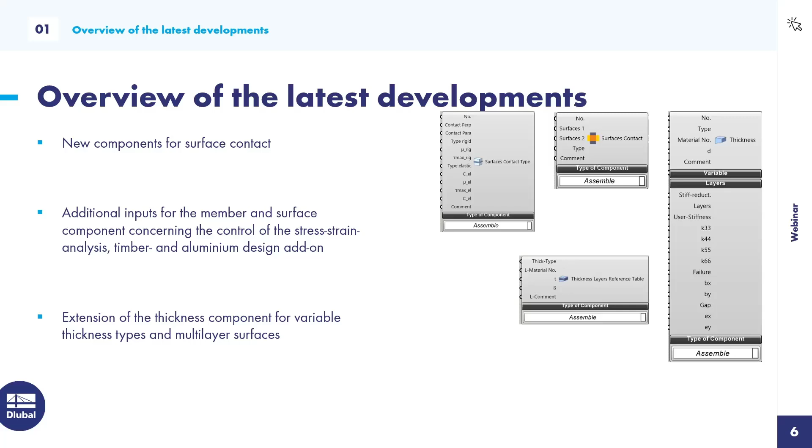The last feature that I would like to show here is actually related to the installation process of Rhino. So let me show you Rhino 8 in a second here. In the past, the plugin could be installed via a specific folder in the Rfem 6 program folder. We changed it. Everyone can install the plugin now via the Rhino package manager. So if you go into Rhino and you call up the package manager, you can search for Dlubal here, and you can see the Dlubal plugin, and here you have various versions of the plugin.

An important information for you: in case you're using Rhino 7, you should use the versions with the number 7 in the front. And in case of Rhino 8, use the versions with the version number starting with the 8. For today's webinar, I'm using an internal version. Anyway, you can do the exact same algorithm in the current customer version of the plugin.

All right, then let's switch to the second chapter of today's webinar, the live demonstration. To give you a feeling for what I'm doing in Grasshopper, I would like to show you the final structure first in Rfem, and then hop right into Rhino 8. So that's the CLT structure that I would like to model. It should represent like a bus or train station, where you can wait for your train or for the bus, and you're protected against rain and wind and so on.

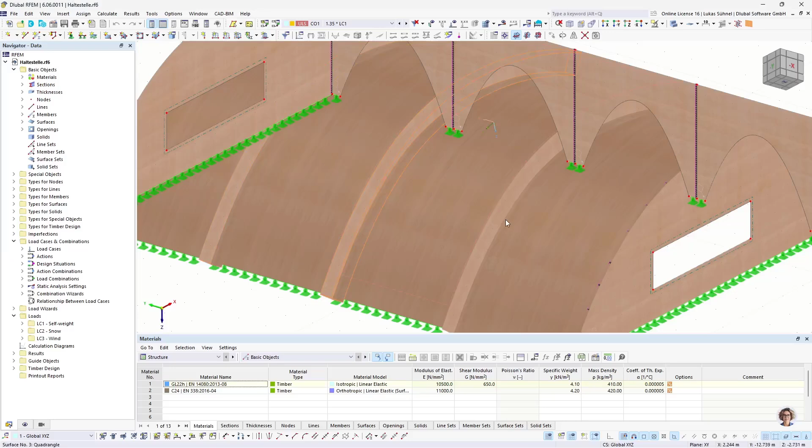So you have here these CLT wall, slab and wall elements, and inside some additional timber beams that support the roof, and on the front some openings to go to the train, and on the side some windows to see if the train or the bus is coming. Obviously a made up example, but it serves the purpose of today's webinar.

I would like to show you the workflow and some new components. What do we have here as well? We have some line supports on the bottom, and additionally some line hinges, because CLT panels are usually connected hinged. So we need the line hinges as a tool here to have the proper force transfer. That's also the most tricky part of this whole algorithm. I will explain it, of course, afterwards.

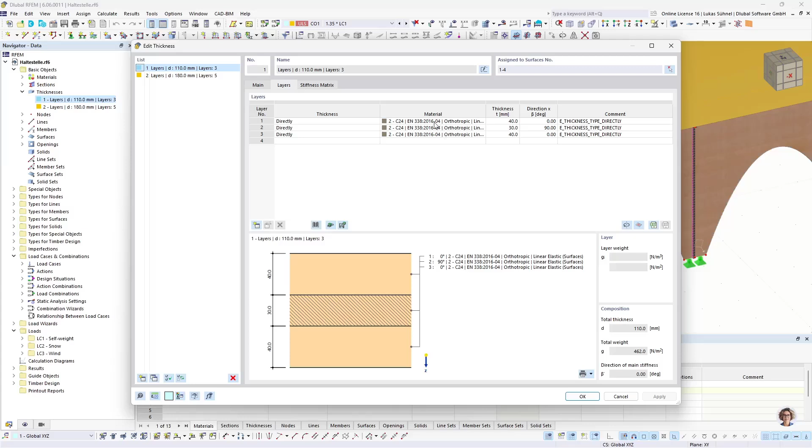And apart from that, we have, of course, our new layer thickness types in here, in which we then define the layers individually. All right. That should be it as a rough introduction of the structure. Let's go right into Rhino 8, and here I will put Rhino to the left and Grasshopper to the right in a second.

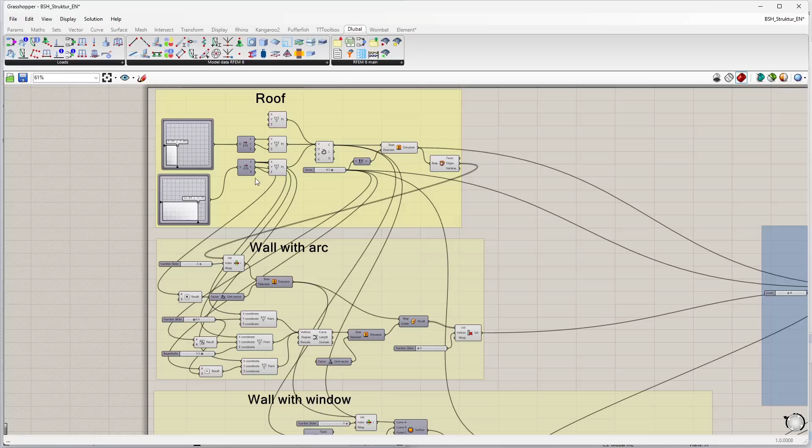One more little overview for you, what I will do in the next hour or so. I will create this algorithm here. We start with the Grasshopper algorithm, where I model the roof of the structure, then the walls with the arc, the wall with the window, then some data management, copying and so on, collecting my objects, the surfaces, the lines that I will use again afterwards, and then the connection to RFEM via our Dlubal plugin.

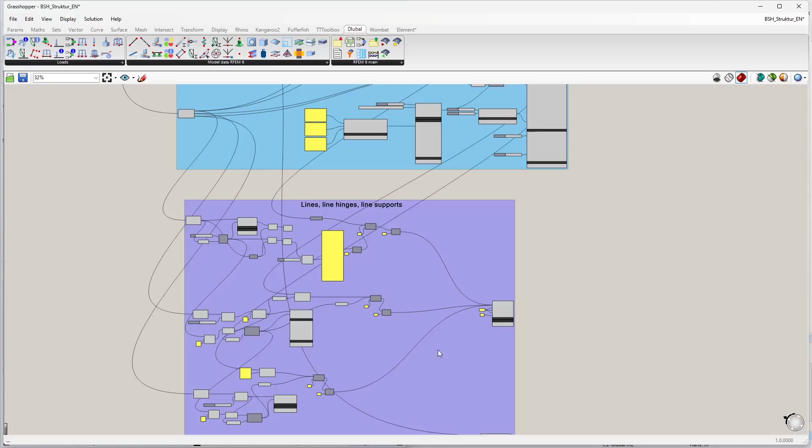I will create materials, sections and members, thicknesses and surfaces, and last but not least, lines, line hinges and line supports. All of those components then will be connected with our export component, and we get the structure in RFEM 6. All right, so let's create a new file in Grasshopper, move it to the right hand side of the screen, and start with the modeling.

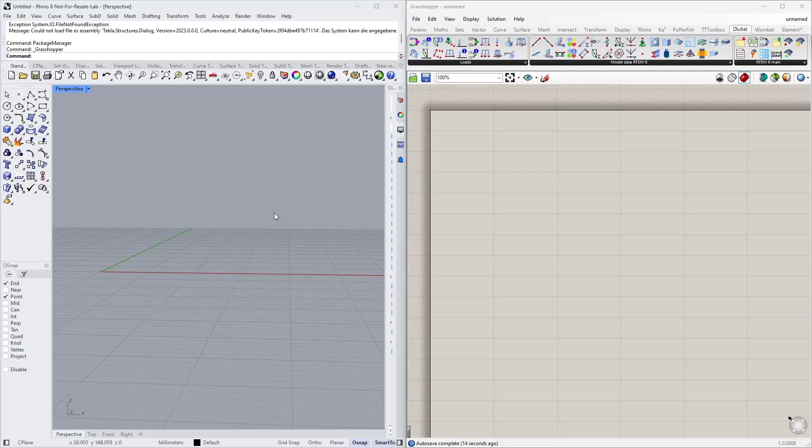As I said, I would like to begin with the Grasshopper algorithm, so I need a plan how to model that, and I will start with the roof. The roof was curved, and therefore I need some kind of a curve with the interpolate component. The interpolate component requires the nodes. You can see it basically on this little icon here. You need to define the nodes and then it will interpolate a line or a curve.

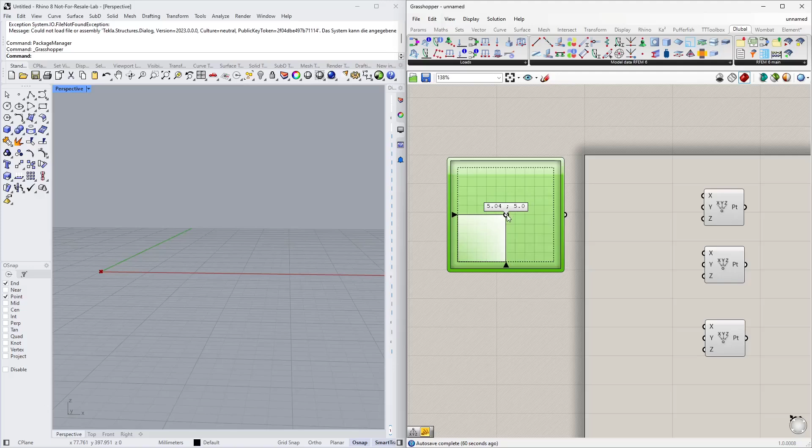And therefore I need 3 nodes and I use the construct point component for that. The coordinates of those nodes should be defined with MD sliders. This MD slider's properties will be changed a bit, so from 0 to 10. So with this slider I can define basically a node, a coordinate x, y, z. Z, however, is always 0 here, so I change x and y coordinates by moving this little dot.

Now my curve will be in the xz plane, therefore I need to deconstruct the node that I get here. So I deconstruct the node and I build it again just using different coordinates. So x should remain as the x coordinate. The y coordinate, which I can modify here, should be the z coordinate. Actually that's already the second node, my bad. The first node should be at 0, 0, 0. So that's the first node here in the center of origin.

The second node, which I can modify now with the MD slider. And the third node should also be modified via an MD slider. So same logic. Y should be set. And now I can define this arc. Let's pick some proper coordinates. And now I can connect it to my interpolate component and I have a curve. So that could be the shape of my structure, for example.

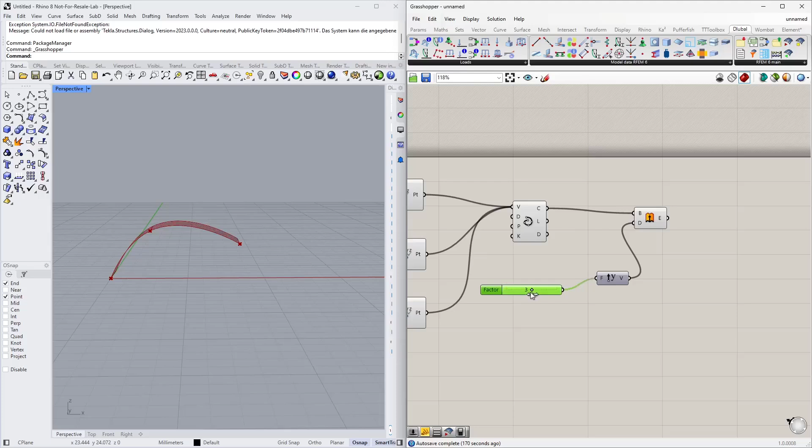Alright, now I need a surface, so I can simply extrude this curve into the y direction. I want to define a distance via a slider, so I define a slider from 1 to 5, for example, using the metric units here in my head. So now I can extrude this line into a surface. Alright, that's already the first part of my little algorithm. And I group it, and for a better understanding I can give it a little name. So that's my roof surface, for example.

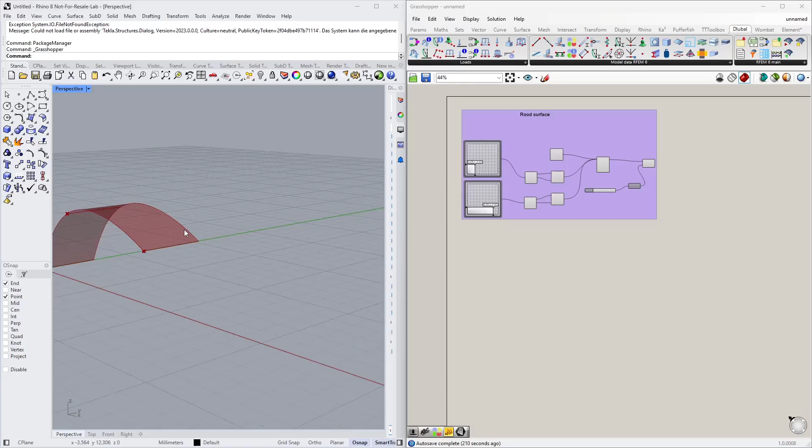Alright, so second part is the wall on the front. Let me show it again in RFEM so you can follow easier. I want to create this wall now with the arc-like opening. So what I need for that is this line here, and I want to extrude it into the Z direction. To get access to this line, I will deconstruct that surface. Therefore, I have here the deconstruct brep command. I link it to my surface.

Now I have here the faces, the edges, and the definition nodes. And I need just one of these edges, so I take a list item component, connect it here, then define the little slider to select the line from that list. Let's see which it is.

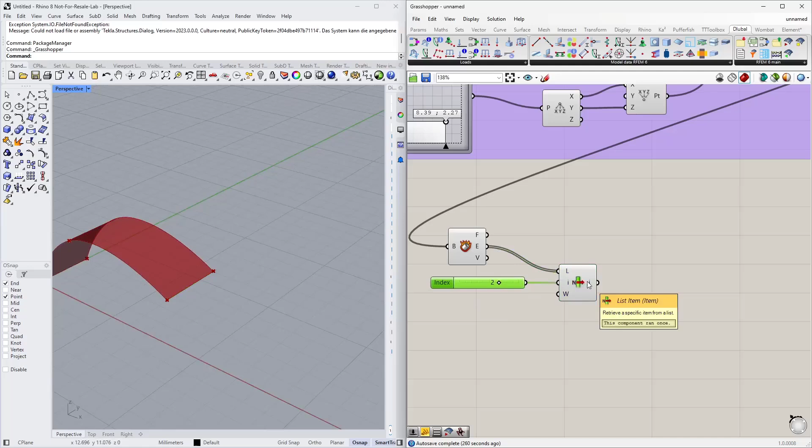Index 0 is the one on the end, on the bottom. Index 1 is this arc. Index 2 is the line that I need. Alright, so I have this single line in this component now. And now I simply extrude it again in the Z direction. And we can already see it is the wrong direction.

So I probably need to multiply it by -1. And the coordinate itself comes from my arc or my curve that I defined in the beginning. It's the Z component or Z coordinate of that node. So obviously the Y coordinate here, and multiplied by -1.

All right. Yeah, sorting can be done at the end of the day. All right. So where should the first node be? Basically, all of the nodes have the same X location as the wall or the end point of my curve. So the X location or the X coordinate is always the coordinate from the last point of my curve. And now I need to modify the Y and the Z coordinates.

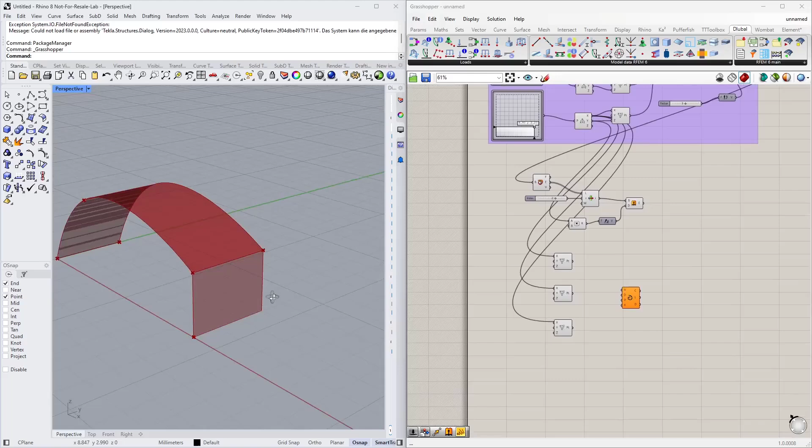The first node should only move slightly in Y direction, so I make a small number slider, and I want to have like floating points, so I change the type of it and connect it to the Y coordinate. So this distance that I define here via this node is basically the length of my wall support on the bottom.

The second point should be in the center. Center basically means the dimension of the extrusion divided by 2. So divide by 2. Link it to the length of the extrusion, and that's my Y coordinate for the center point. And I need a number slider to modify the Z coordinate. All right. Maybe also with floating points, so like that.

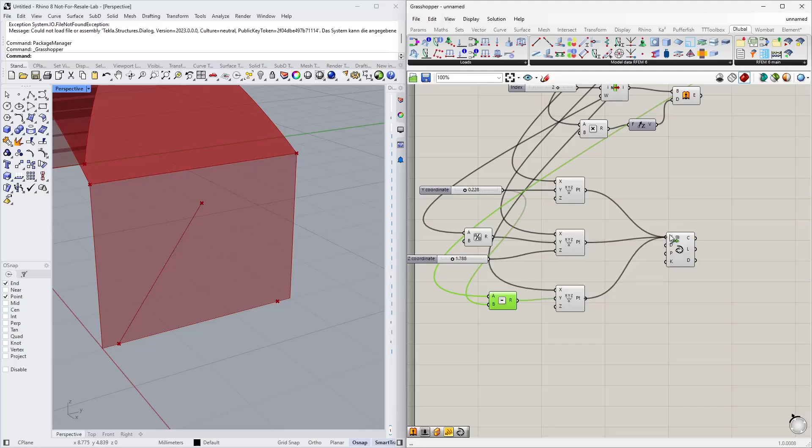And the last point is again on Z on the bottom of the surface, and it should have the same distance as the first point. So again, I just do a little subtraction. I subtract my required support length from the extrusion length. That's the Y coordinate. So whenever I change the length of the support, it will change on both sides. All right, these are my 3 definition nodes for my curve. And now we can see it.

The next step is, let's say, like a trim command. I would like to cut out this part of the arc from the rest of the surface. I can do that with the component split brep. The base surface is this one, and the so-called cutting shape is a surface. So I need to extrude my arc again into X direction to get a surface for it. So actually extrude first, extrude in X direction. Yeah, just any surface. And now I can use it to cut the original shape.

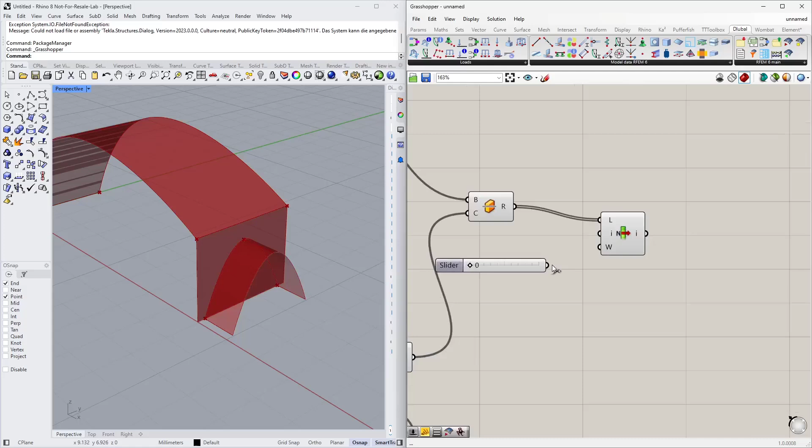I get here 2 surfaces now. I just need one of them. So again, a list command to pick one of those indexes. And a little slider to select the right one. So index 0 is, let's say, the surface of the opening. So index 1 is the remaining surface, and this one I want to keep.

So let me hide some of the other objects to see the result of my little algorithm. That's the remaining surface. That's the one I need for later. So I already finished the second part here. Again, I could give it a name. Arc, surface, whatever. Just that I can easily understand what I'm doing even a couple of weeks later here.

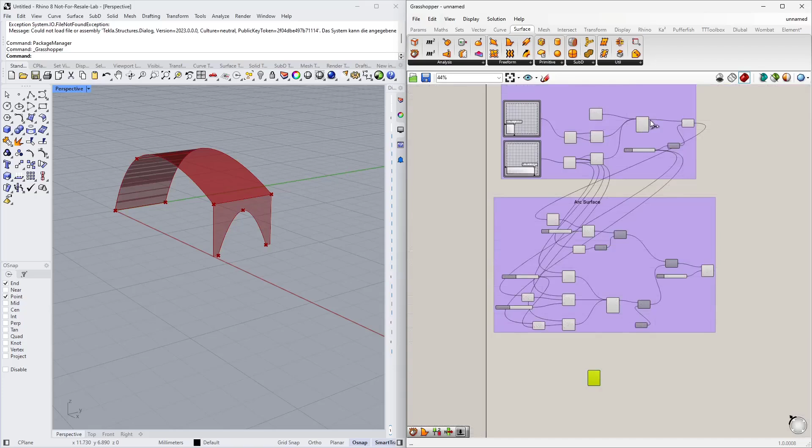And now the last surface is the surface in the front. To create that, I would like to use the edge surface component. I only have to define the boundary lines. One of my boundary lines is, of course, my arc that I defined in the beginning, like from the roof, or not arc, but curve.

And the second curve for my surface should be this side line of my front surface. So again, I deconstruct this surface here in the front, and I try to select this line here on the side. Again with the list item component.

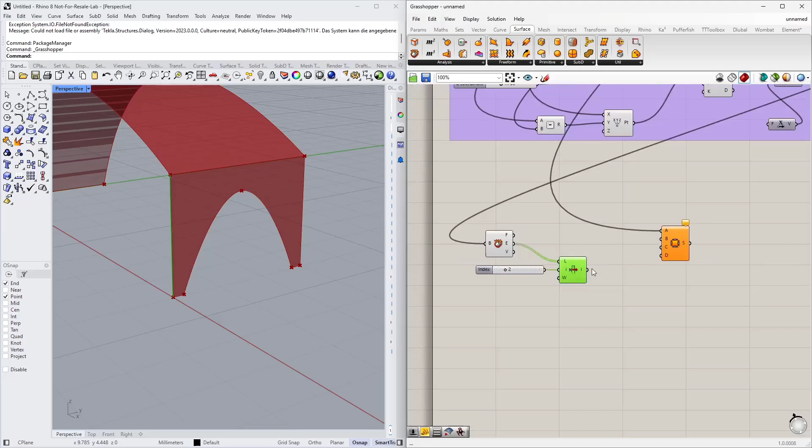Let's connect a slider to it, and now let's go through these lines to see which of them it is. Oh, sorry. The edge lines, of course, obviously. So that's the other side. Oh, come on. Yeah, now I have it already, index number 2. It is, yeah, that's the line I need. So I connect it again to that surface component, and I already get the final shape.

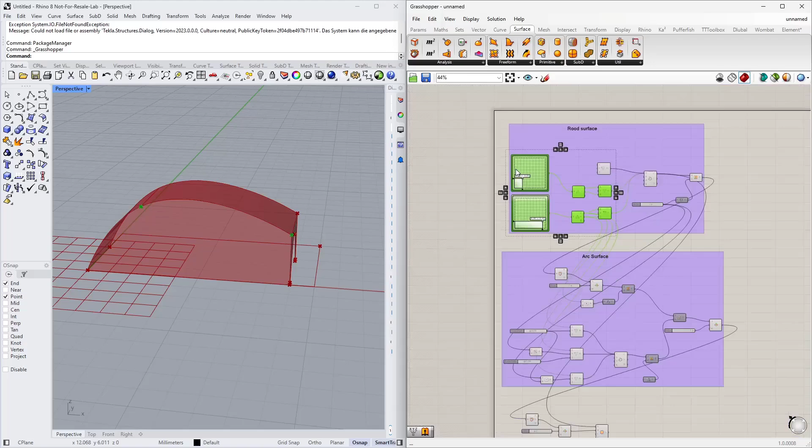So far so good. Now I need to cut out a rectangular hole in here. Same logic as before. I will create the rectangle in this case by 2 points. The 2 points are A and B. And then I extrude the rectangle and then cut it again from the original surface. These 2 definition nodes of the rectangle can or shall be defined again via an MD slider. So I just copy some of those things here, copy, paste, and I will reuse it down here.

This time, yeah, no, actually that's already okay. I can connect them as definition nodes for my rectangle. The rectangle can be placed in any plane, as you can imagine. So I can define the plane by setting it here graphically, or in the Rhino lock, or however you call this area here on top. And I would like to have the rectangle in this ZX plane.

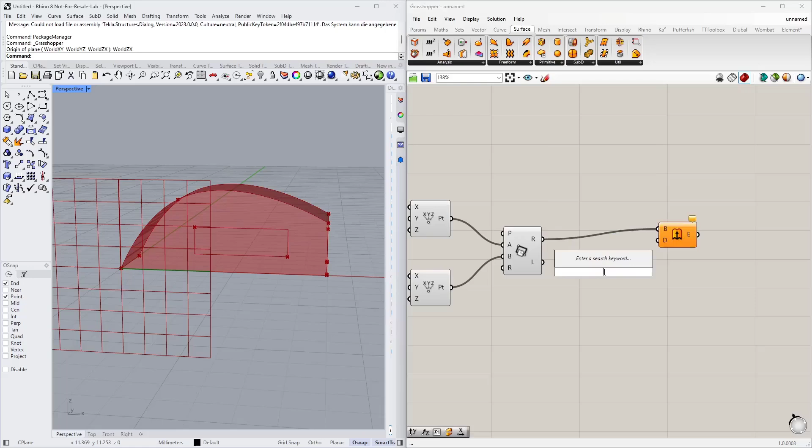Okay, that's not on the right plane. Let's set some proper coordinates for the rectangle. So maybe that's the size of the window that I would like to have, and now I have my rectangle here. Again, I extrude it into the Y direction, and now I can use the split command again, split brep, to cut out a hole.

Let me copy the list item that I defined on top here. Again, I want to keep only one of those surfaces, and this time I think it is the index 0. Exactly. So let's hide some stuff to see the result of our work here. That's the remaining surface with the opening, the rectangle opening. All right. That's already the basic geometry that I need.

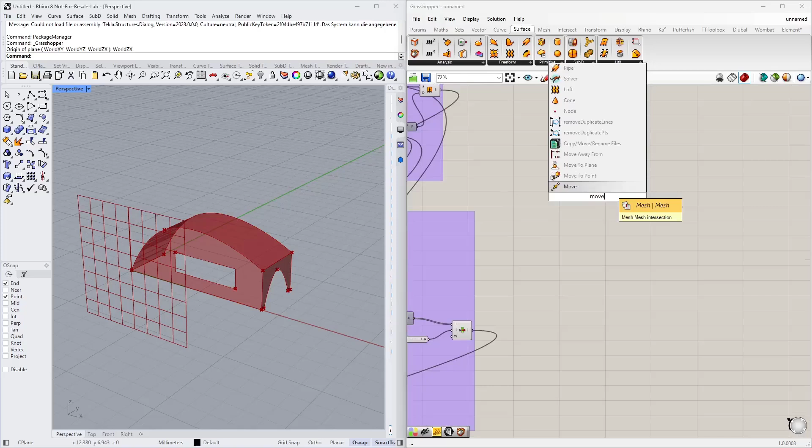And now I can copy this stuff. Side wall, let's say. Okay. Now let's copy the surfaces. That can be done with the move command or move component. And which objects do I want to copy? Of course, my roof surface and my front surface. And the default is set, as you can see. It's copying it in the vertical direction, which is not correct. I want to copy them in the Y direction.

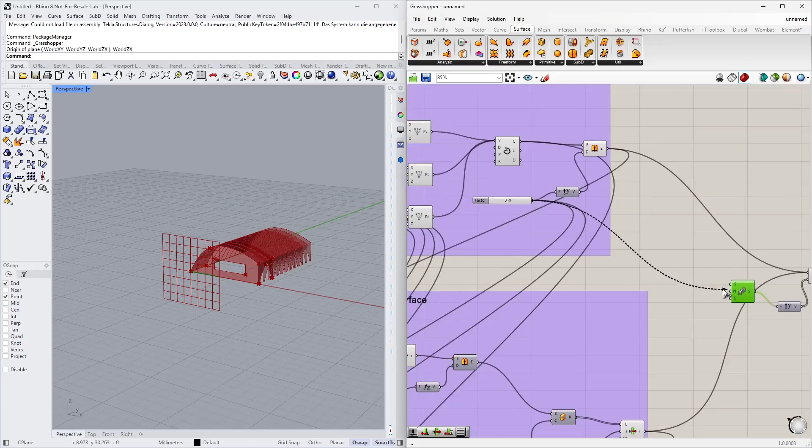And I want to copy them multiple times. For copying something multiple times, you can combine a move command with the series component, and as a step I would like to use the extrusion length, of course, to have them placed next to each other. Now I can control the amount of copies with a small slider, let's say 4 copies. All right. That's a big part of the structure.

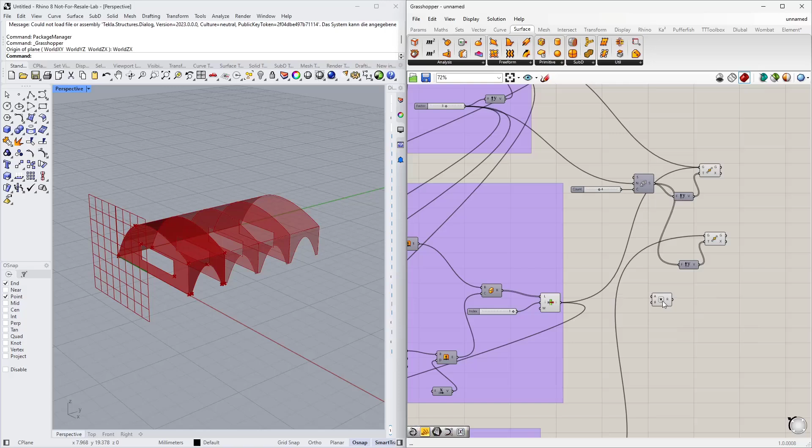Now I only have to copy the front surface to the end. So I use another move command for that. And I copy this surface. Of course, not multiple times. I only want to have it one time. And the distance for this is actually a little multiplication. We simply multiply the extrusion length with the amount of copies. And that's the length that we need to copy it from the front to the end. Okay. So far so good.

The geometry is done. What I need now is a little bit of data management, because afterwards, thinking of the RFEM 6 connection, I need a collection of lines. I need the collection of lines on the bottom, all of those down here, because on those lines I would like to assign a line support. And I can use these lines in my line support component to export it to RFEM 6 afterwards. Additionally, I need these 3 internal curves, because I want to assign a member or a cross section to them. And maybe also a collection of all of the surfaces that I have.

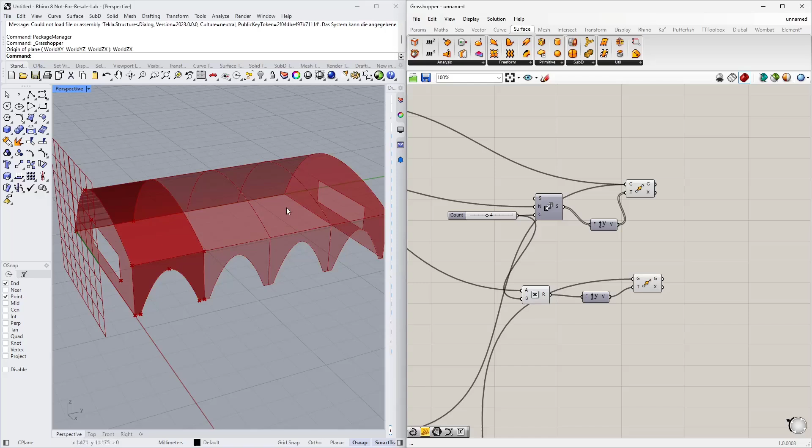So maybe let's start with the curves for the beams. How do I get those? They are basically inside that component. This component contains all the surfaces from the roof and from the front. Now, if we take a look at the data in that component, we see that it has 2 groups. Let's call it 1: 4 open extrusions. These are my roof surfaces, and in the second group, my wall surfaces.

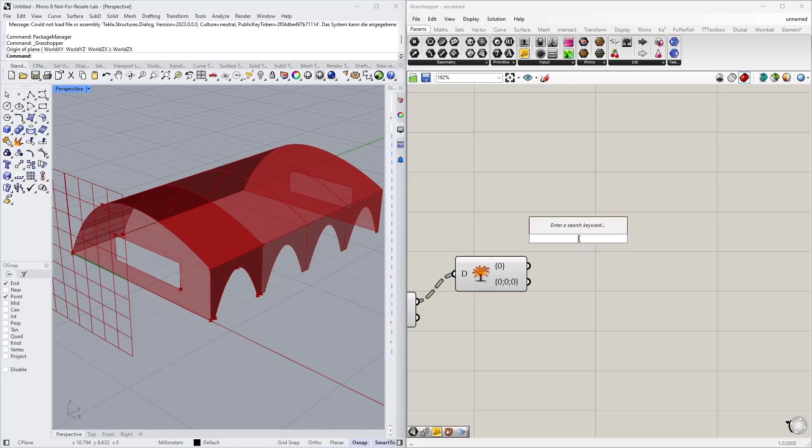So what I can do here is I can explode this tree and get access to each branch of my tree. First branch, second branch. And the first branch, as I said, contains the surfaces of the roof, and I can deconstruct them again.

So you can see it here again. Those are the surfaces, and of course the boundary lines and so on. And now I would like to select only these internal curves, so basically just one of those lines per surface. So I need again a list item component from my edges, and let's see which of the index numbers it will be.

The index 0 is the lines on the bottom. I need that maybe later for my line supports. I'm looking for the roof curves. And index number 1 is the one that I need. It contains these curves. However, it contains 4 and not just the 3 that I need.

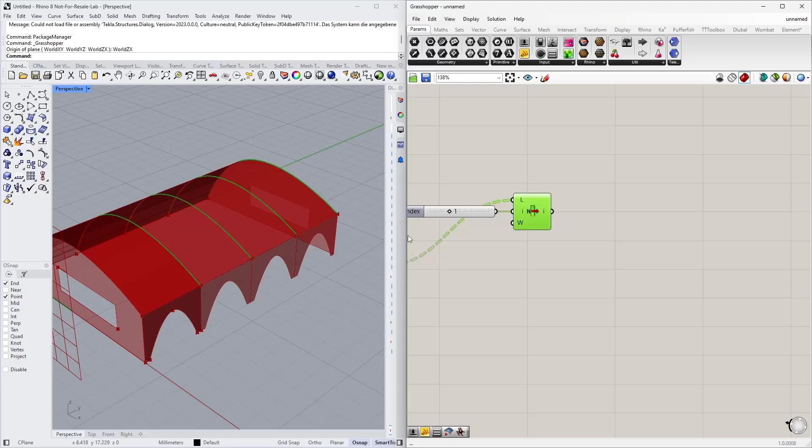So what I can do now is get rid of the last index from that list. Currently, it is not a list. It is, let's say, a tree. On each branch of the tree, I have 1 curve, but I can make a list out of it by flattening this tree. And now I remove the last index. It can be done by using the cull index component. And the last index can be defined by a panel with the -1 value. And the remaining lines are the ones that I need for my beams.

So let me collect that in an additional component so I can easily reuse it afterwards. Maybe again a little comment here: curves for beams. Okay.

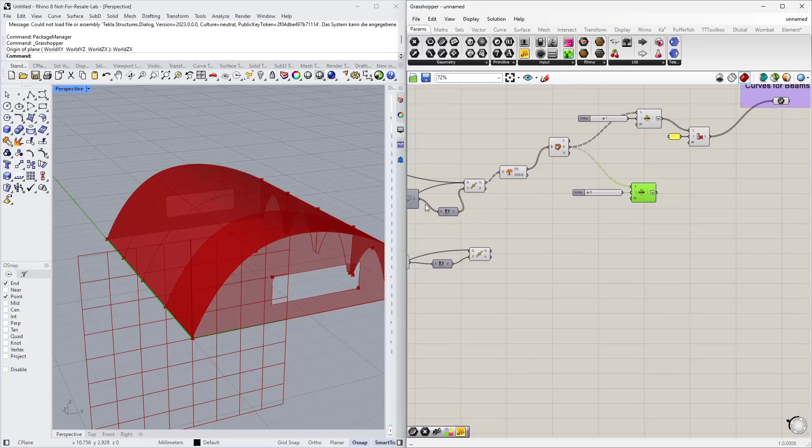Now, the second part should be the curves for my line supports. We already saw it in that component. Here I can select the curves on the bottom of those roof surfaces. It was the index 0, so that's already one part for my line supports. And the other bottom lines are included in the wall surfaces.

So basically I can copy this part, connect it to my surfaces here in the front, and now look for the index number of those walls. Which of those lines are the ones on the bottom? So I scroll through that. Index number 1, as we can see. And now my slider is not long enough, but I can tell you that it's the index number 5. So I need index 1 and index 5. So I create a little list, 1, 5, and connect it to that component.

So this list item gives me now 2 lines, the index 1 and the index 5, and you can hopefully see that it's the line on the bottom, on the right and on the left side.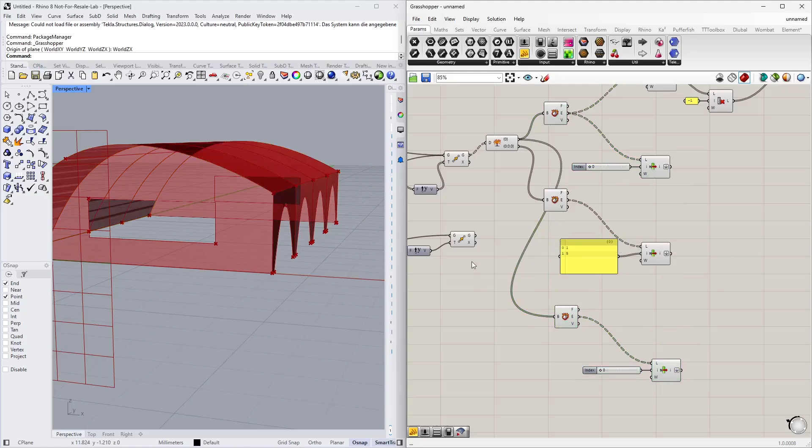Now I need the bottom line from the side surfaces. Same procedure. I copy again this part. I connect it to my, well, actually I need 2 surfaces: the front surface, which is down here, and also the copied surface from the back. And from both surfaces I need 1 line. We can already see it is the index 0. So in here I have now 2 lines, and these are now the lines that I need.

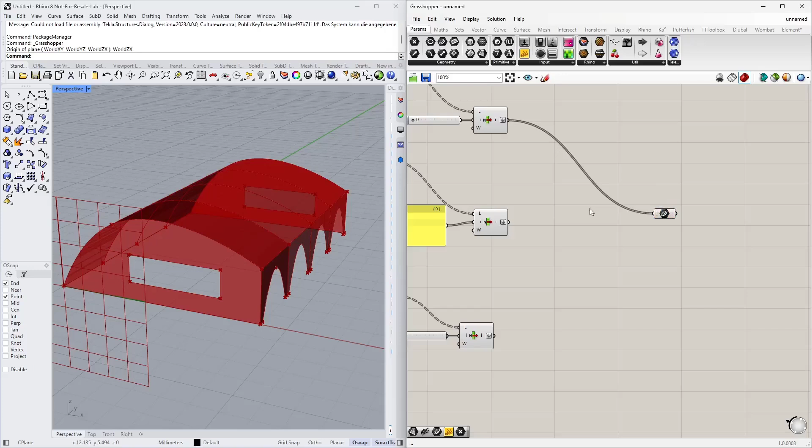I can collect all of them in one component again. So just connect them to the curve component, and that component contains now all the bottom lines for my line supports. So again, give it a little description: line support lines. Okay.

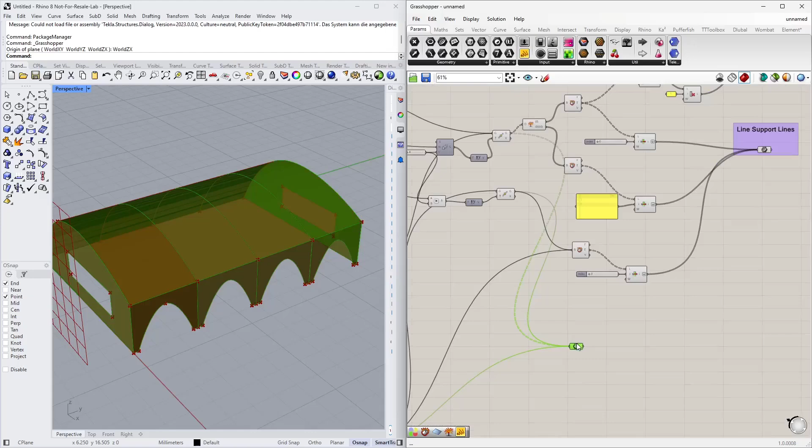And then I also collect my surfaces in a surface component, and I think most of them are contained in that component where I copied them. And additionally, I have the front wall and the wall on the back, which is in here. So this surface component contains now all surfaces. All right.

So far, so good. Now, the next part is the connection to RFEM 6. Therefore I need my Dlubal plugin. Let me increase Grasshopper for a second. The Dlubal plugin will show up after you install it, obviously, and it is divided in 3 parts. We have the model data group, which contains most of the basic objects: nodes, lines, members, surfaces, materials, sections, also components for solids, for thicknesses, supports. I think most of the stuff that you need is implemented in here.

We have another group which is called loads. In here you have components to create load cases, load combinations, but also the loads: nodal loads, line loads, member loads, surface loads, but also imperfections, in case you want to assign them as well. And the last group contains general components, for example the export component, import component, a component that allows you to run the calculation of RFEM 6 via Grasshopper, or other components. For example, as I said, I use in the internal version the global mesh setting component.

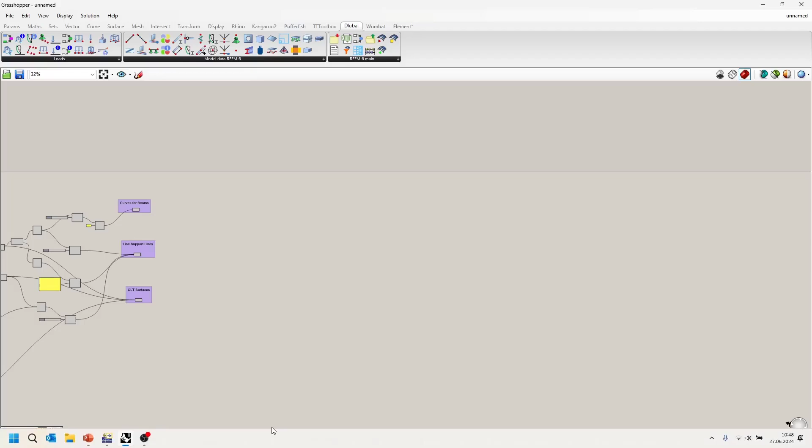All right, how do we start? I think RFEM gives us a nice hint here. The data navigator in RFEM shows us the basic objects and then specific objects, types for nodes. And it's kind of the logic that you use when you're defining your structure. First you define materials, then the sections and the thicknesses. Then you continue maybe with members and with surfaces and solids and so on. And the same logic we use in Grasshopper. I start with the definition of my materials and sections.

The material component can be found here. A material can be defined by the index number that it should get in RFEM 6 and the name. The name ideally equals the name of this table down here. So you can define your material in RFEM and copy the name. By the way, to get the full name, you can check the program options and see if you have the full section and full material description activated in here.

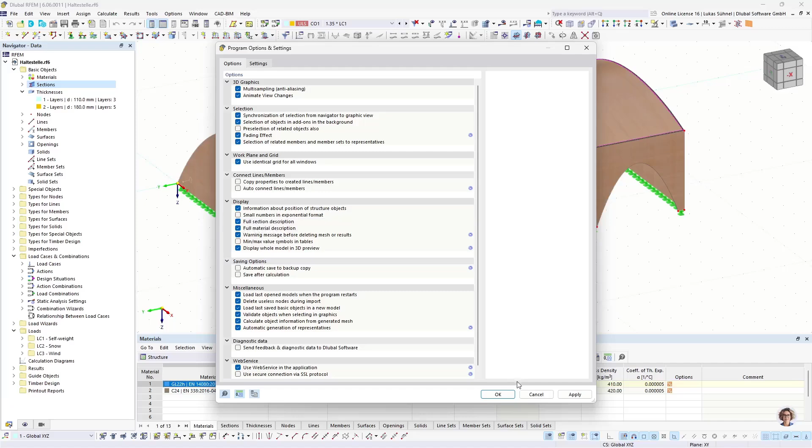If you do not have this option activated, you only see GL22H. The code related part of the name will not be shown. But to have a clear assignment of a material, you need also the standard. So we can copy that name and paste it into Grasshopper.

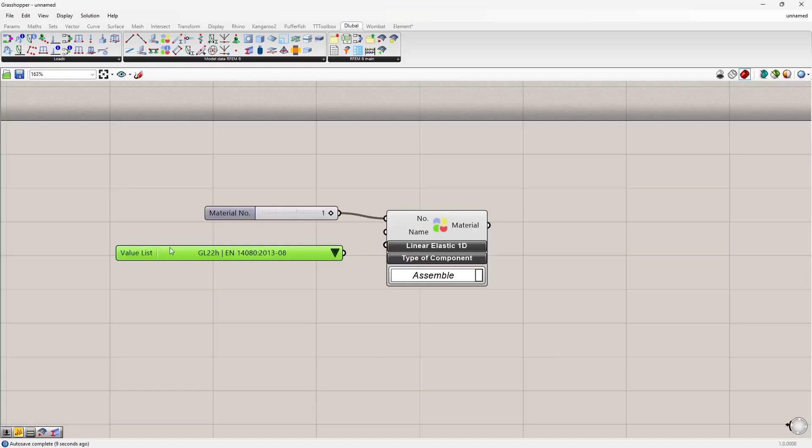Alternatively, if you had previous projects and you already defined materials and sections, you maybe already created a little library of materials and sections that you use again and again. And that's what I did. I defined here a value list, and I put my own information into that value list.

You can do it by editing this value list and then just insert the names into it. That's the name that it shows here, and then that's the name which is behind that little description. It's identical for me here, but you can simply copy these things here. Then you select the material that you want from that little list and assign it to the name input. And that's all you need to do.

I copy my material. I need a second one. Make sure you change the index number. And then I select here the material C24. The first material is for my beams. The second one should be for my CLT surfaces. And for surfaces, we have to use, or that's what I want to use at least, the orthotropic 2D material model. So I use a value list to read the options of this material model input, and select orthotropic 2D.

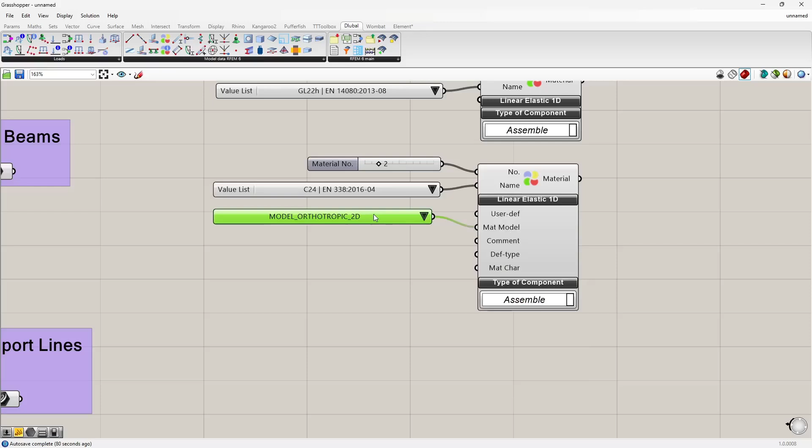All right. Now, next step should be the definition of a section. Therefore, we have the section component, the section for my beams. And again, I assign a name, a number, and I have to assign a material and the name. The material I can link directly from the material component to the section component. This step can only be done if I define the index number first.

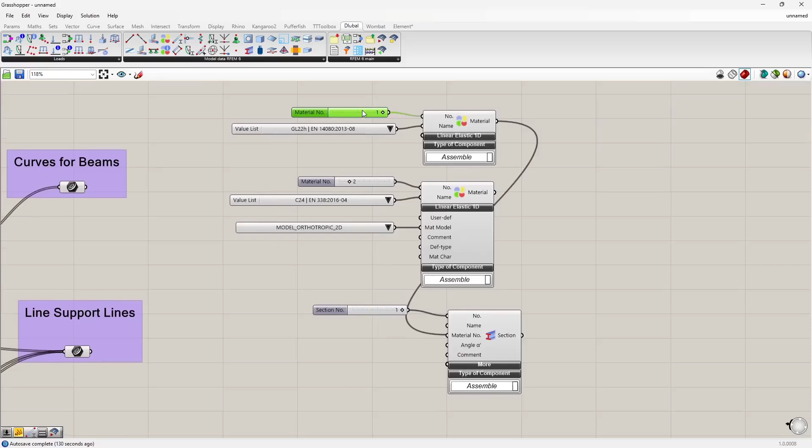Because what we expect in this section component is the material index number, 1, 2, 3, 4, 5. And to transfer it from that component to this one, I have to assign it here first. If I do not assign it, this connection will not work. That's why personally I usually define all these index numbers for all my components so I can link them together.

Now the last thing is the name. The name is quite easy. It's an RM1, rectangular massive section, and then the width and the height. And I could copy the string and paste it into Grasshopper, or I build it parametrically. The name is just a bunch of strings combined, basically, text panels, and the name consists of the part RM1, then a value for the width of my section. And I use here a slider from 0 to 1. I explain it in a second.

Then the next part of the name is the slash, and then another slider for the height of the section. All these parts of the name can be joined by a text join component. You just plug it into this input here. And you get the name, or you get one string out of it. Let me show it. Here we are missing the space. Okay, so that's now the name according to RFEM. There is just one little difference.

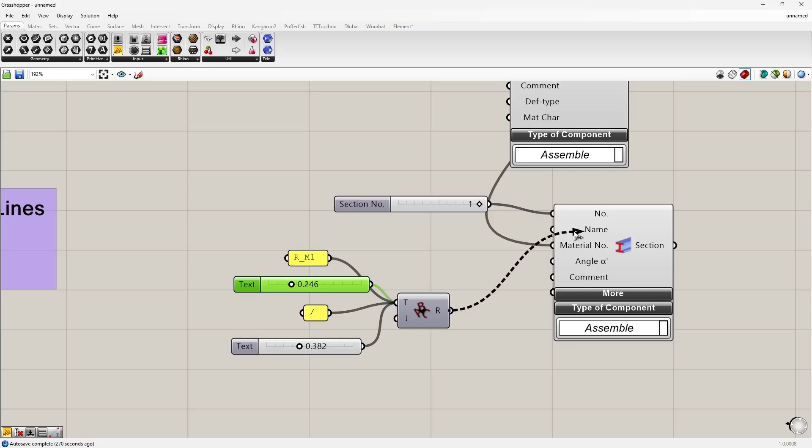You can see here I'm using meters, 0.24 meters, and not millimeters as it is shown in RFEM. This has the following reason. The Grasshopper link is based on our web service, on our API, and this API expects SI units. So I have to define the dimensions of my sections here in meters, so that I get the right size in RFEM. Therefore, a scale between 0 to 1. Now I can link it to my name input and the section is done.

Last step for this first group here is the member component. Let me show that too. A member component with some basic definition inputs. Under more, you find options for hinges, eccentricities, nonlinearities, or rotations for the member, and under design, related inputs. Let's start at the beginning.

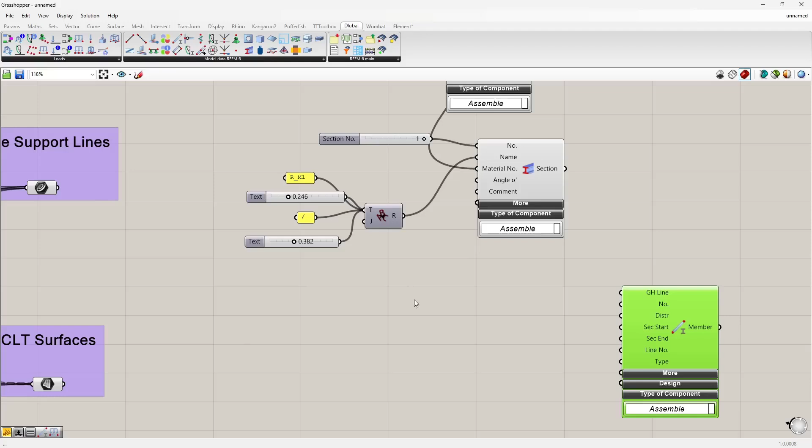I need the Grasshopper lines for my members. These 3 lines. Let me rotate the structure. These are the 3 beams, and I already collected them in here. These are the curves. And I connect them to my member component.

The section should be this rectangular section, and that's basically it. There's just one thing that I'd want to define in the member, and that's related to the design. I have here timber beams, and I would like to feed already some timber design related settings, so that when I export it to RFEM, I have most of the information already defined for the design, and I just have to calculate it.

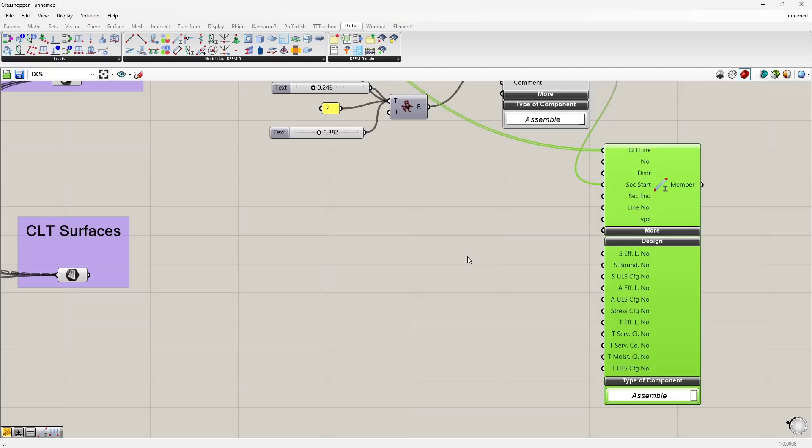So I have some inputs here, as usual S for steel, A for aluminum, then T for timber, and for timber I can define the index number of the effective length type, the index number of the ultimate limit state configuration, or the index number of the service class. I can't define these classes in Grasshopper, but I can define the index number of the existing type.

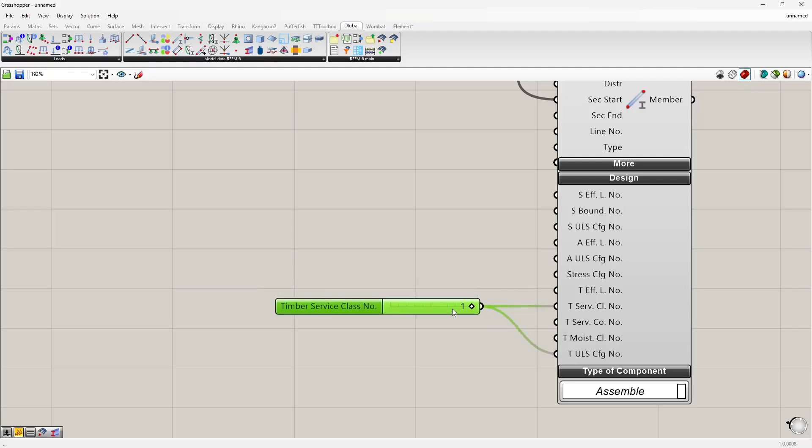And now you may ask, which existing type? We never defined them. That's where the templates come into play, and I will explain at the end of this webinar how it is working. So let me define these types. I used index number 1, and again, more details I will show at the end when I explain templates. So that's already my first part. Let's group it. Materials, sections, and members.

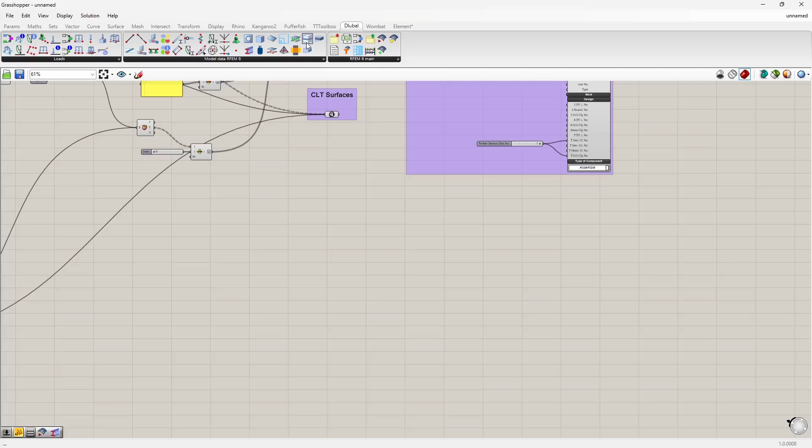Okay, that's what I have to define here in Grasshopper. So let's start with the thickness component, which we have here. And the thickness component, again, needs an index number. Then the type, I can use the value list for that. In 99% of the cases, the tooltip will tell you what kind of input is required. You can see it here, value list. So I connect it, and I can select here layers.

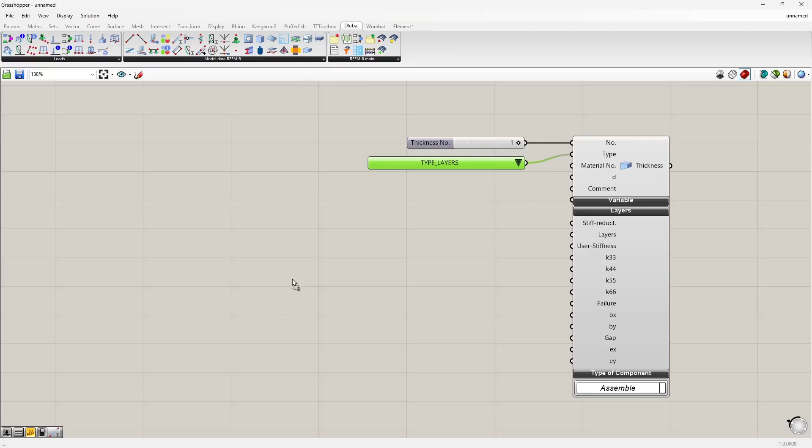In case of layers, I can open the layers tab in this component, and here I have the layers input. The layers will be defined in an additional component. We had to split it up. So in that additional component, I define the material, the thickness, and the direction. This little table that I displayed in RFEM 6, and this information will then be transferred to the thickness component. All right, the material should be material number 2, C24, orthotropic material model.

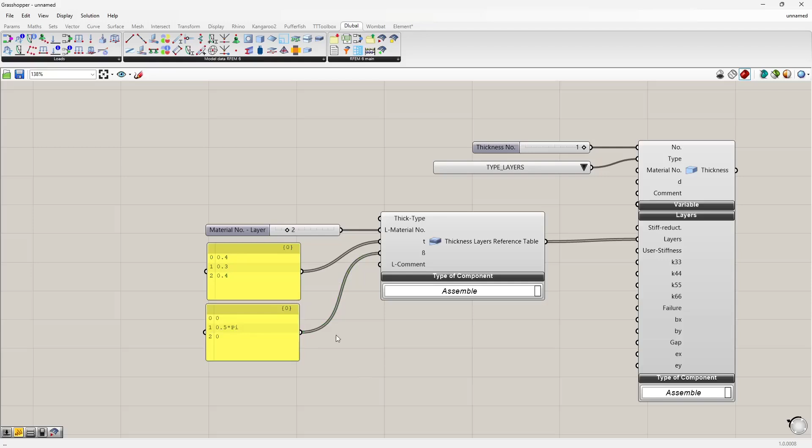The thickness can be defined in a little table. Let's say 0.4, 0.3, again meters, 0.4. And that should be a list. And the same logic for my rotations, the direction of each layer should be 0, 0.5 multiplied by pi, 90 degrees, and 0 again. Okay. This is this little subtable which I showed in RFEM, and it is connected to the thickness component.

We have a lot of additional inputs in here. I can show them as well in RFEM. I do not use them today, but in case you want to apply a stiffness reduction to these CLT thicknesses, then you can activate them with this button, and then you have access to these modification factors and additional options, and all of them are included in our component, as you can see here. So that's the thickness that I want to create.

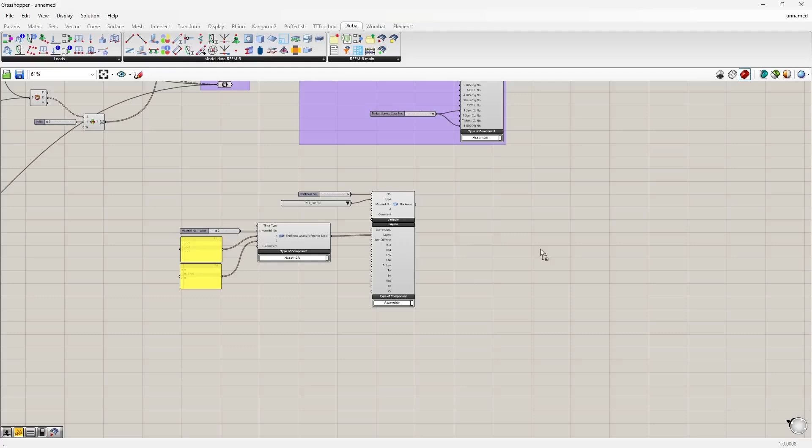Now I need to connect it to a surface component, and the surface component expects additionally the Grasshopper surface. Now I want to use that thickness type for the roof surfaces. That surface component here contains all surfaces, again in a tree-like structure. I showed it before, 3 groups. My roof surfaces are in group 1, so what I will do here is I explode the tree that I have here and use, I need it later as well, the surfaces from the first branch for my surface component.

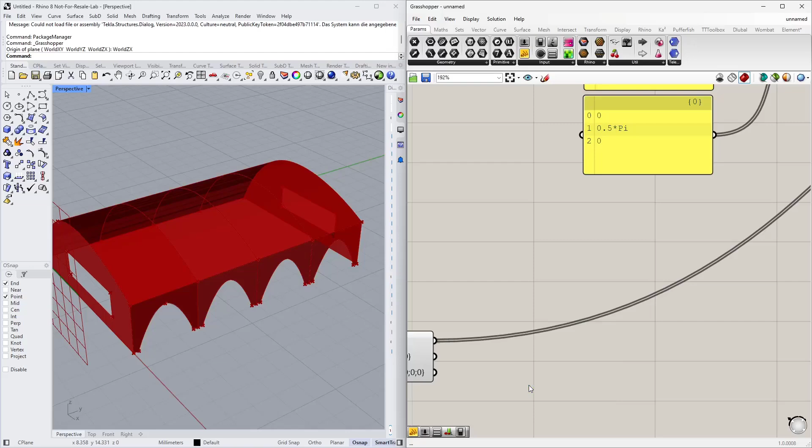The last step here is the numbering. As I said, I tend to number all my surfaces, so that can be done with the series component. The index number starts with the value 1. So I define here for the start index number 1. The step is of course 1, so 1, 2, 3, 4, and the amount of index numbers that I need is linked to the length of this list. I have here 4 surfaces inside, depending how many copies I create in my Grasshopper algorithm. So the length of that list is basically the amount of copies that I need.

So I can count the length with the list length component and connect it here to the amount of copies. And now I get a list of 4 index numbers, 1, 2, 3, 4. That's what I need for my surface. All right. That's the surface component. And now I need another surface component for my walls. So I simply copy all this stuff.

Copy paste. This time I want to use the remaining surfaces. So these are my front surfaces and these are my surfaces from the side, and I connect it as Grasshopper input. Concerning the thickness for the walls, here I would like to use 5 layers, so I simply copy them.

Okay, same for the directions. Okay, and I need to change the index number, obviously, of my thickness. That's second thickness, so index number 2. Again, the remaining part is the numbering of those surfaces.

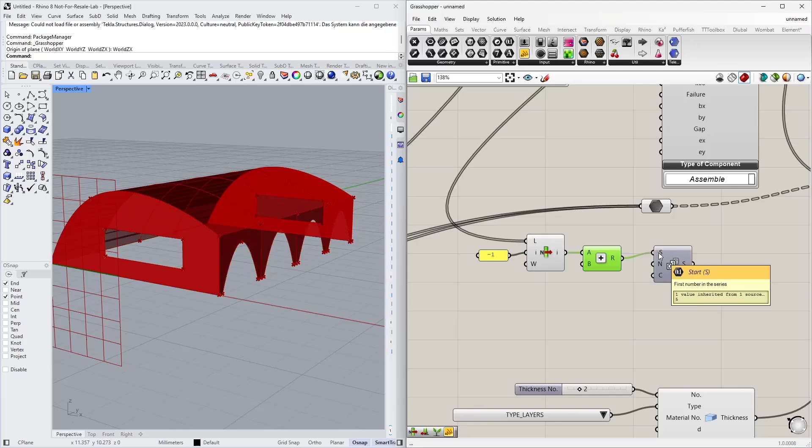And now I have here index number 5, which is parametrically defined depending on the amount of copies and so on. And this is my new start value for the numbering of my walls. The step is again 1, and the count is basically the length of that list. Again, it is not a list, it is a tree structure, as you can see here, but if I flatten it, I have a list, and now I can read again the length.

Here it is. The length of that list is again the amount of copies that I need. So I have here the numbering 5 to 10. So that's exactly what I need. 6 values for the numbering, 6 surfaces. That's good. All right. One more thing that I would like to define in here is a mesh refinement.

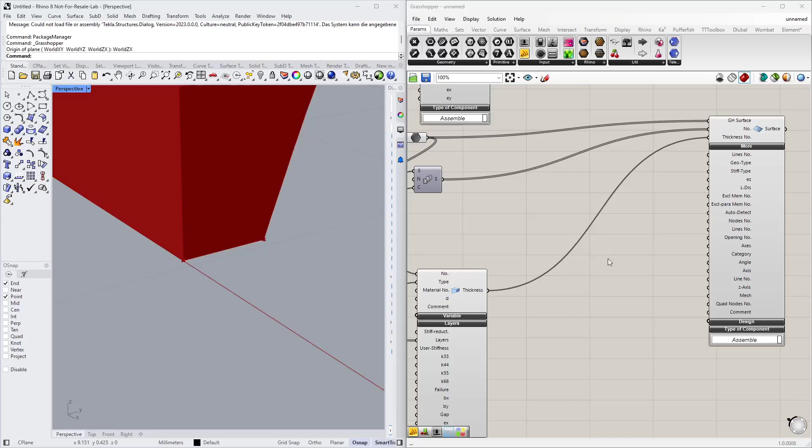Why? Simply because the global FE mesh length is 0.5 meter. We have here a distance of about 0.3 meters. So let's have at least 3 elements over this length here. So I would like to use an FE mesh length for those wall surfaces of 0.1 meters. Therefore, we have these mesh refinement components.

Here's the surface mesh refinement component. I assign the index number and the required length, 0.1. All right, and I simply connect it to the mesh input. Now, what I forgot also on the surface on top is those are timber surfaces, obviously. And again, I would like to define some things for the design afterwards: the service class and also the ultimate limit state configuration.

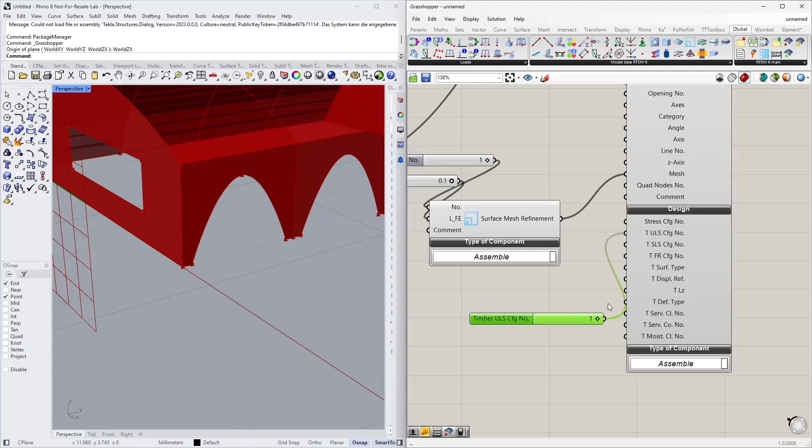Therefore, I assign here type number 1 for the ULS configuration, and the same here. Let's extend the design tab. ULS configuration, service class. All right. Again, explanation will follow afterwards. Now, this is the second big group for the connection to RFEM 6. And now the last part, which is related to the line hinges.

This is the most tricky part, I would say, in that example. Let's have a look inside RFEM, how they are defined. Line hinges, as I said, control the force flow between surfaces, and we find them under types for lines, line hinges. I have just one type here for all of the surfaces. And what we can control here is the hinge conditions, which force should be transferred and which not.

In my case, I simplified it a bit. I say it's just free about the rotation of the local x-axis. So basically along the line hinge, the rotation about this axis should be free, and the rest should be fixed. That is easy to define in Grasshopper, that's not the issue. The difficult part is this string on the top here. How is it set up?

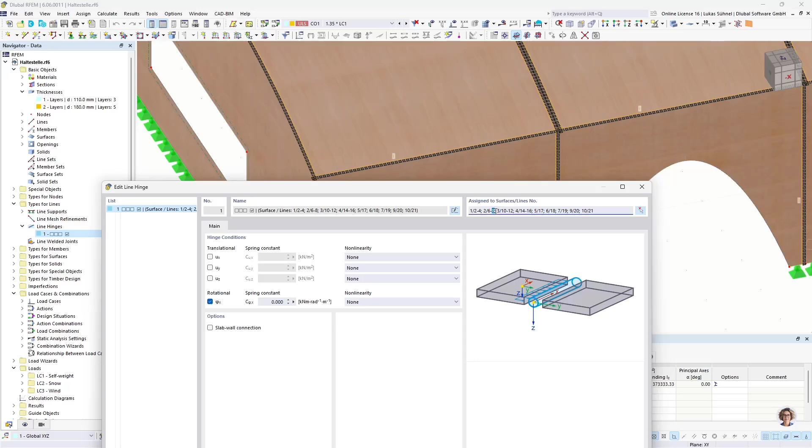It is set up in a way that we have here the index number of the surface where we want to have a line hinge, and then the related lines. So for surface number 1, lines 2, 3, and 4. For surface number 2, lines 6, 7, and 8, and so on. And this is split by a semicolon and a space, and then the next group of surface and lines comes.

So somehow I have to build this string in Grasshopper, and therefore I need the index numbers of my surfaces and of my lines where I would like to have a line hinge. So let's have a look again at Rhino and Grasshopper.

I do have a numbering for my surfaces. Yeah, I did that here. But the lines where I would like to have a line hinge are not numbered. So let's start here. I assign an index number to my lines. Therefore, I use this line component here. And the line component requires the Grasshopper line and, let's say, the index number that I want to assign to it.

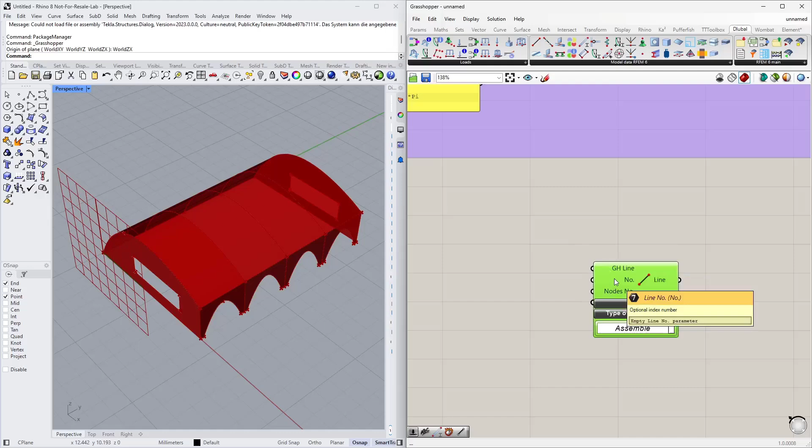The lines for the roof are included in the roof surfaces. I did it multiple times already. I can deconstruct those surfaces. I get my edges out of them, or I get here the edges of those lines, and I can simply say these edges should be numbered, and the number should be starting with the index 1 until the amount of lines that I have here. So I need a series component.

The series component, or the number, should start with index number 1 again, and the amount of copies depends again on the length of this list. Let me show it quickly. I have here 16 lines, but grouped again. So what I will do is I will make a list out of that group. List length. So I want to use this list.

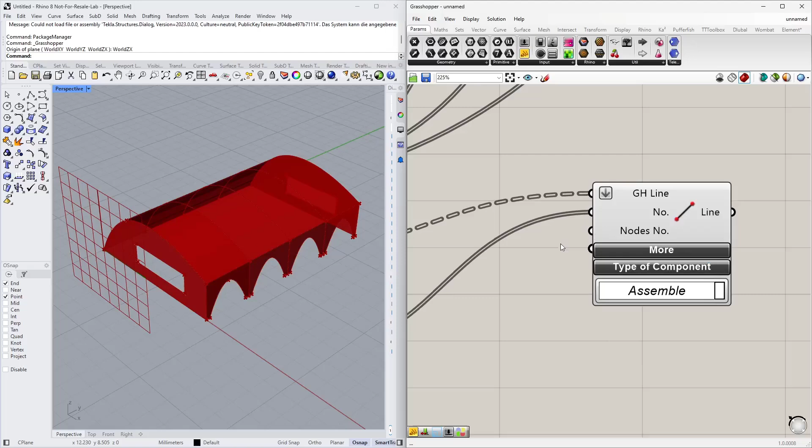However, I flatten this tree to get a list, and the last index, 16, I will use for the count. So I get now the values 1 to 16, and these are my index numbers. Sorry, wrong input. Here, number. I also flatten this input here for the Grasshopper line because I need to combine list and list. Otherwise, I will get more lines afterwards. So I have to combine a list with a list. So far so good. All my lines from my roof surfaces have an index number now.

And now I somehow need to combine my surface index numbers with my line index numbers. How can I do it? I can do it maybe by collecting the numbers of my surfaces again down here. So this series component, if you remember, contains the 4 index numbers for my roof surfaces. So let me simply bring them down here. So again, I have the same list now here. And let's have a look how the values are shown. I have here the list with the 4 values, and I have here my 16 index numbers for my lines.

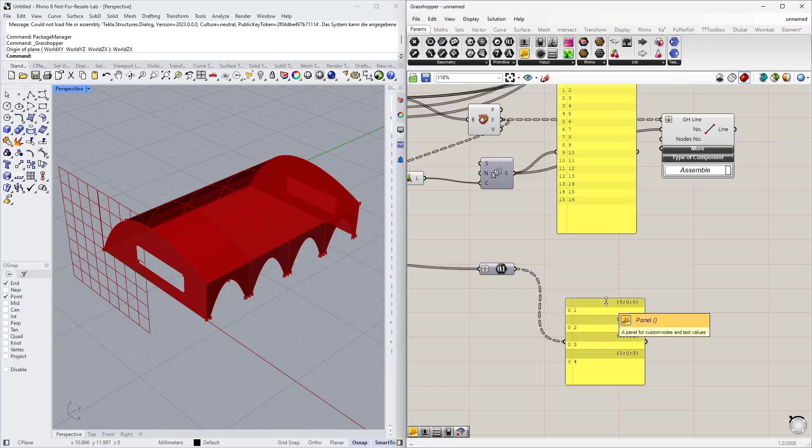If I want to group them in a way that I have always surface 1 with related lines, surface 2 with related lines, a tree-like data structure would come in quite handy. So what I can do is I can graft my numbering to a tree. So each index number will be transferred onto its own branch. You can see it here now. Each of these branches from my tree has 1 value. So I have some kind of grouping now. And the same grouping I need for these numbers.

I would like to have the lines that are related to one surface in one group. I have it already somehow. I have it here. Each surface has these 4 lines, or they are grouped, let's say. And this grouping I would like to assign to my numbering here. How can I do it? I can deconstruct the path. Oh, wrong. Deconstruct path. I can deconstruct the path that I just showed here, where the lines are grouped.

And then I can unflatten a tree from these numbers. And then I trim that tree. Trim tree. And the result will look like this. I have now these numbers, which were in a list before, grouped, and groups similar to my surfaces, as you can see here. So now I can combine the first branch, the first surface, with the related lines from the numbering.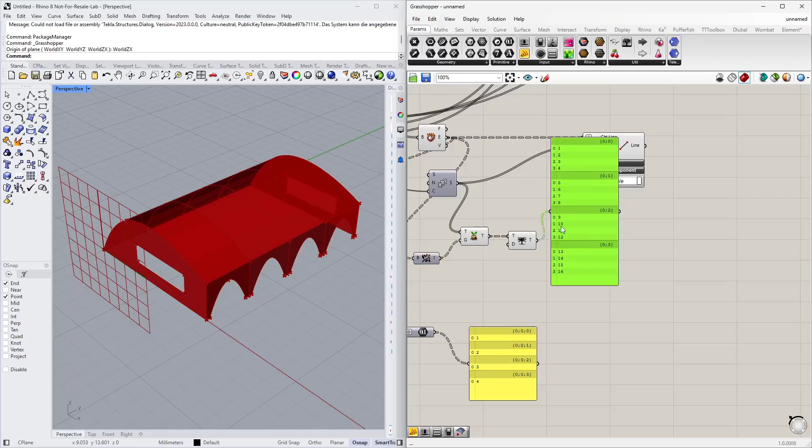Before I do that, I have to get rid of one of those index numbers. Or let's say differently, I do not need a line hinge on the bottom lines. I have a line support down here. There's no reason for a line hinge. So I get rid of the index number 0, which is always the bottom line for each group. Easy task, cull index. So we remove the index with the number 0. So now only 3 lines will remain here.

And how can I build the string that I need for my line hinge now? I can use the text join component a couple of times actually to get the desired result. The first thing that I will do is I need these index numbers, the line numbers, split with a comma in a string, not in a list as I have it here. So I join them, and each value should be, is it a comma? I guess. Yeah.

Each value should be divided by a comma. So let's see the result of that. Yeah. 2, 3, 4, 6, 7, 8. Okay. Now I can join my surface numbering with the line numbering.

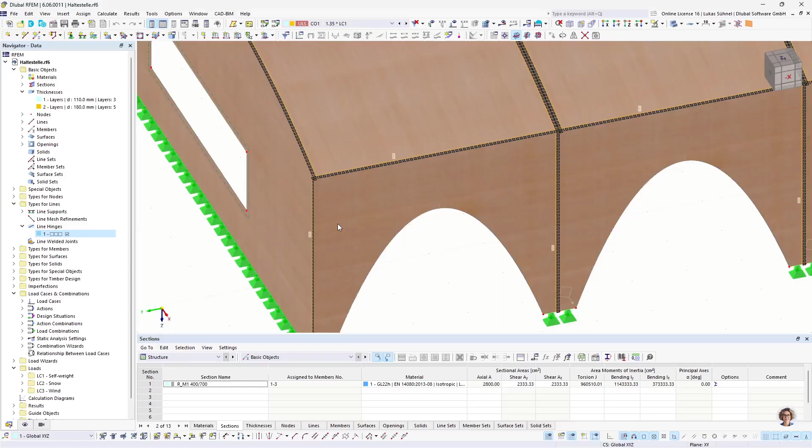So index number 1, surface 1, and then the 3 lines, in surface 2 the 3 lines. Similar to what we have in RFEM. Let me show it again. Yeah, surface 1, line 2 to 4. Doesn't matter if we have here 2 to 4 or 2, 3, 4. RFEM will accept our description method, and so on.

And now I need it in one long string, or that's my requirement at least. So I will flatten this result and join it by a semicolon and a space. Okay, and now the result looks like this. And this is exactly how it looks in RFEM.

So far so good. Now let me use a line hinge component, assign a number to it, assign this string to it that I just created and define the connection. So I would like to fix all forces in each direction and release the rotation.

You get the information as a tooltip in here. Free rotation is defined by the value 0. Rigid can be defined by inf for infinite, and any other value will be in Newton per meter, in case of a spring. Okay, that's all regarding the line hinges.

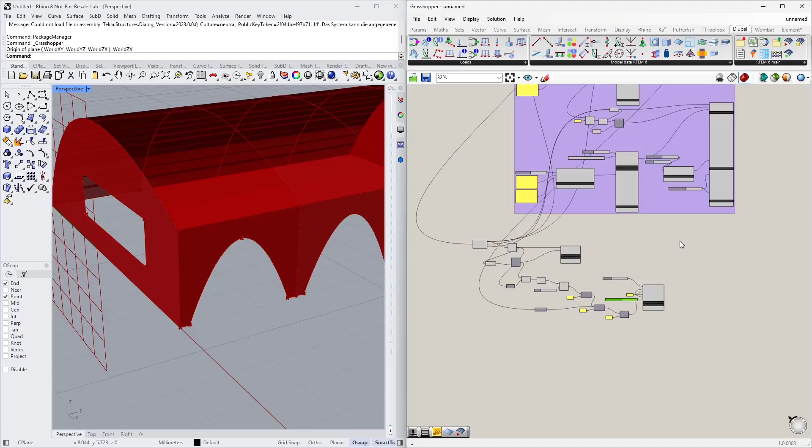If you did all that, the next step would be to connect it to an export component. We have it here. That's the export component. Which inputs are required for that? I tend to use a Boolean toggle to run the export. I set it to true if I want to start the export. And if you leave it on true, it's like a live link. Whenever you change something in Grasshopper, it will trigger another export, or you just set it back to false to stop it.

The input, that is basically the connection between all our Dlubal components. So each of these Dlubal components have to be connected to the input. Oops. I will skip it here because I will switch in a second to my final example, but you can imagine what you have to do here.

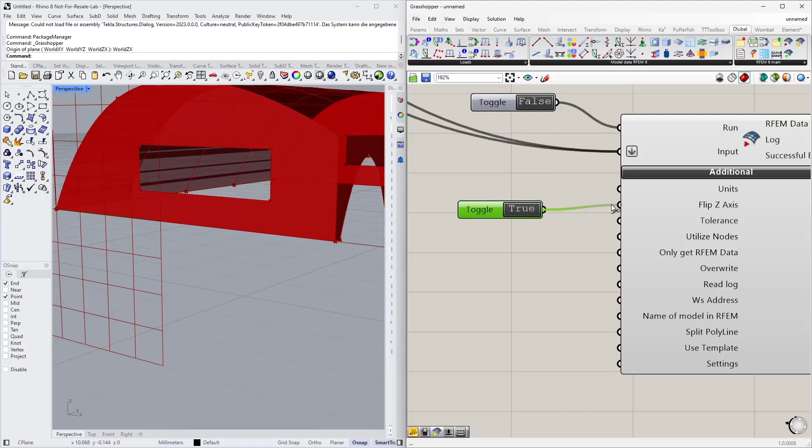And then we have some additional options. Flip the z-axis, which I usually use again via Boolean toggle, because the global z-axis in Rhino shows upwards, in RFEM, at least in my case, downwards. So I flip the z coordinates here.

What else do we have? We can define the name of the file in RFEM after the export. I don't know, Example. So if I export it in that way, the RFEM file will be named example afterwards.

And the last feature that I would like to show here is the use template function. I mentioned it a couple of times when I defined my members or surfaces, and it's quite a strong tool, I would say. As you probably noticed, not all of the objects that we have in RFEM can be defined in our plugin.

We are working on that. You saw it in the beginning. We extended a couple of components, we defined new ones, but not everything is included in here already. If there's something missing, then you can't use it, obviously. But we thought, okay, maybe it would help if you can use a template from RFEM. What's that? Let me go into RFEM quickly.

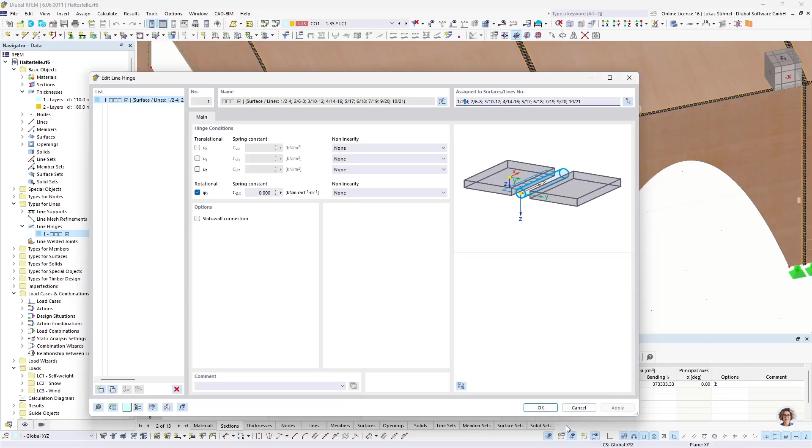A template is basically a file which already contains specific things. So what you could do, for example, is you could create a new RFEM file. Imagine that's a new RFEM file, and you define some things in there. Maybe some materials, or maybe some sections, or you define already the load cases in that file, the load combinations, or add-on related stuff.

Here you define the service class options or types that you would like to have, or the ultimate configurations for the timber design. You can define all of that in advance inside RFEM. And not only that, also the add-ons that you want to use in that template: multi-layer surface add-on, timber design add-on. All these settings can be saved inside a template.

Save as a template. It's a file that you can put anywhere you want. And then you can link that template to our export, or you use it in RFEM itself. So when you create a new model in RFEM and it should not be empty, you can say, please read the data from my selected template into that new file. And you don't start from scratch. You already have your load cases, combinations, materials, whatever you defined already.

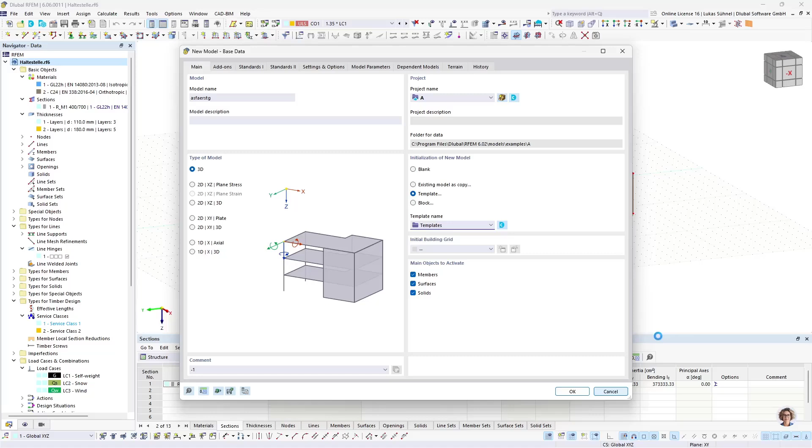And that's the same logic that I use in Grasshopper. Before I run the export of the data that I defined here, I can read the information from a template. And I can link this template via the path. So I go into my Windows Explorer. Now I have to remember where I put it. I think it's under programs, Dlubal, RFEM 6.02, models. Example, I think company templates, and here's my template CLT1.

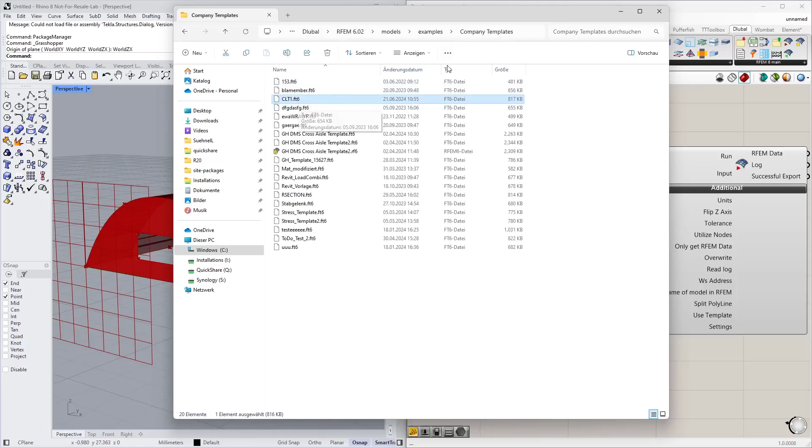So I copy the path, put it in a panel, add the CLT1.FT6. FT6 is the ending for templates of RFEM 6, and I link it to my template input. And now when I run the export, it will first read the information from the template and then the information that I defined in my components.

And since it reads the information from the template first, and I already defined a timber class in that template and a configuration for the timber design, I can simply use the index number of that type and assign it to my surface, my member, whatsoever. So I don't have to define it in Grasshopper, but I can use it from the template. So far so good.

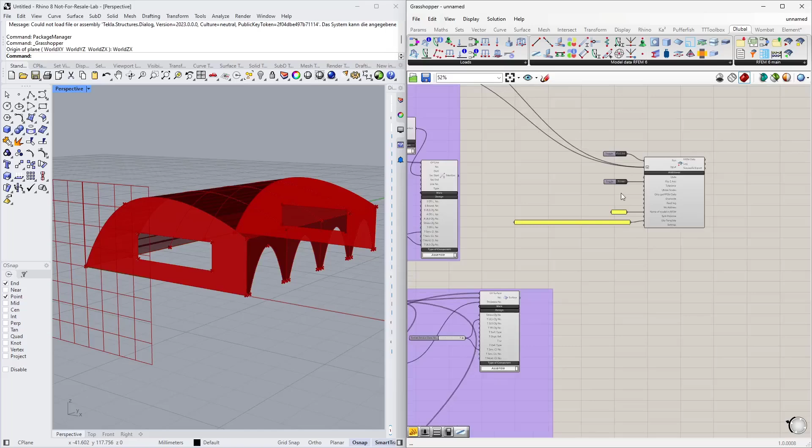Let me show the final. Oh no, that's not the final. The final algorithm. We did all that here, and a part of the last group. These two definitions are missing due to the time. I think it's anyway clear how I did that. And now we can run the export, and I would like to show that at least once.

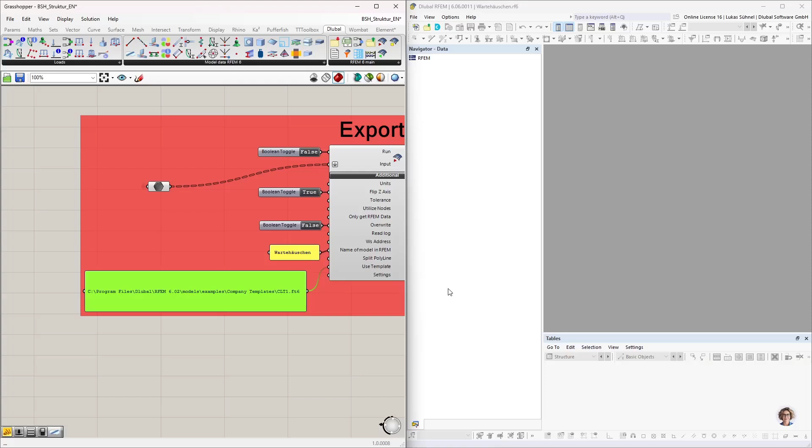So let me put it on the right-hand side. I close that file. And now, that's the path to the template. And now I can change it to true, and we should get the file in RFEM. It's creating a connection with RFEM. Reading the data from the template. You can see it already here. Load cases and so on are defined. That's part of my template. And then it will create materials, sections and so on based on the Grasshopper algorithm.

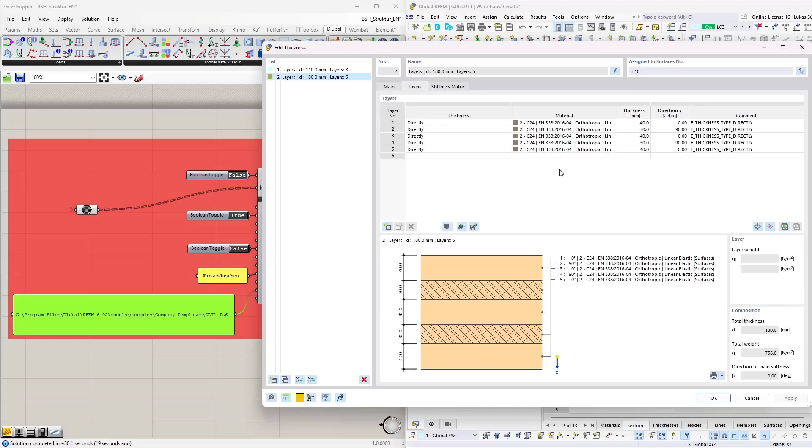All right. I disconnect the connection and I can see my file here. I have the geometry that I expected, my surfaces with the openings, my thicknesses with these layers that I defined before. And that's already a file I can calculate. Let me maximize it for a second. I can generate the mesh. In this predefined algorithm, I used a mesh refinement of 0.2 meters. That's why I have just 2 elements and not 3 over the width.

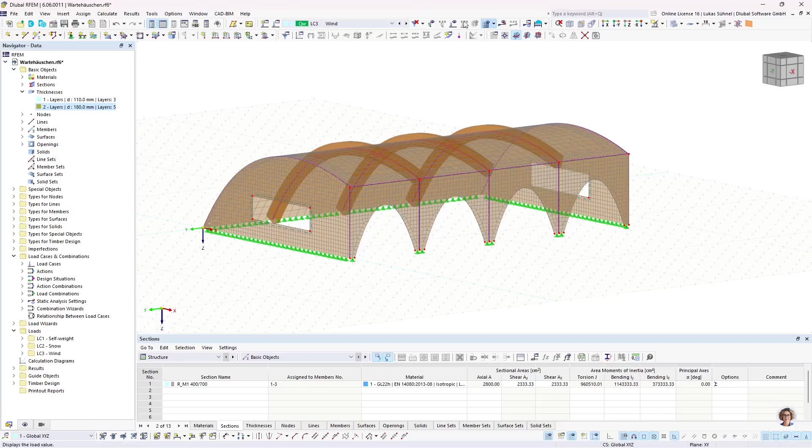But you can clearly see that the mesh refinement has been defined on these walls, except the roof, where I have the global FE mesh settings. And we can also see that I have these line hinges defined, and all the things that I showed here. And if everything is fine, we can also run a calculation and get the results. And this step, running the calculation, can also be triggered via the Grasshopper component. So that's also possible. All right.

That should be it from my side. I hope I was able to show you some new stuff, some helpful workflows, maybe regarding the numbering and the line hinges.